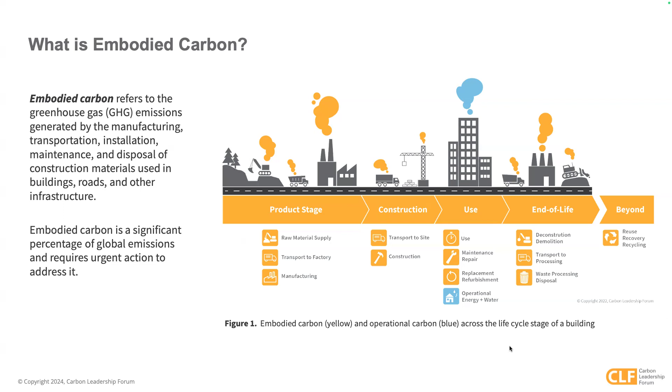It's really critical that we address embodied carbon now, because the emissions released early, the embodied carbon of those materials, are more critical than emissions released later, since we have a limited time remaining before the tipping point of our climate crisis. So it's important that we address embodied carbon now, and policy is a lever for us to be able to scale that impact.

So policies that address embodied carbon are being proposed and adopted at all levels of government, federal, state, and local, at a rapidly accelerating pace.

The Northeast US and Canada case study report was published in March of this year, just last month, and it's a compilation of 9 of these policy case studies, which showcase the range of options available for governments to address embodied carbon. The precursor to this report was the Pacific Coast Collaborative Embodied Carbon Policy Case Studies, which CLF published last year, with a similar collection of policies on the West Coast.

Each of the case studies in the report explores the policy's development process, the stakeholders that were engaged, any challenges faced along the way, and the keys to successful adoption. The case studies were created by interviewing many of the people involved in their successes.

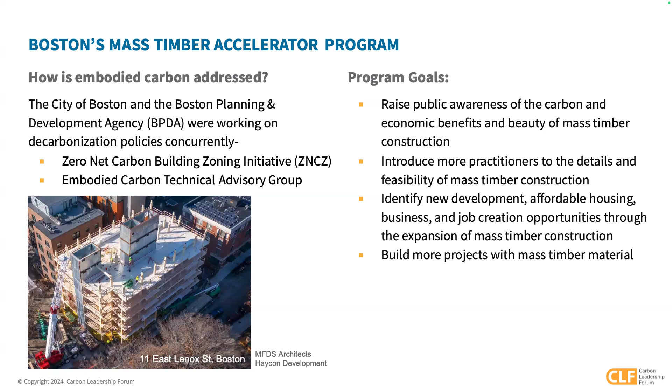The program came together with the offering of $25,000 technical grants, but I think also as important was technical assistance provided through WoodWorks. So we were bringing mass timber building experts into the conversation. We ran two funding rounds and selected a total of 10 teams.

The teams were selected based on projects they had in the permitting process with the city. These were real, live projects, early in their permitting process - sometimes referred to as the land use permits. So buildings hadn't been designed, but we were already asking projects, what are you doing to reduce adverse impacts from building development, and what might you do around embodied carbon? This was a pretty fitting moment to engage project teams. They proposed their particular focuses, their buildings, assessed conditions, investigated design solutions, and did life cycle assessments on the materials.

And then, I think quite importantly, they presented their work to a peer group - the other participants in the program and city folks. We also scheduled education sessions, in particular building code detailed sessions that helped folks really get into the nuts and bolts of putting together a mass timber building.

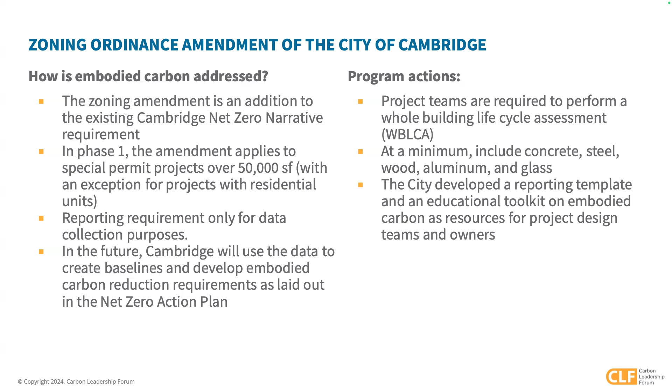Last year we worked with some consultants to help us put together a reporting template and educational toolkit, which Michelle Lambert here was a part of and did a fantastic job with, helping us understand what exactly we should be asking for through doing a whole building lifecycle analysis, and how to communicate these requirements to developers. So we can go to the next slide.

And so while it's great that we have this policy in place, there have been some challenges that we have faced. Partly, it has been really difficult to actually collect this data. Development in Cambridge happens on a boom and bust cycle, and I think we are just in a lower time for new projects.

Our requirements are also quite narrow with the exclusion of residential units, and a lot of new construction happening, a lot of really big new construction, is usually mixed use. So the exclusion of residential really does hinder the projects that will end up reporting on this requirement.

Another challenge we are facing is that Cambridge has adopted a lot of new policies over the past year for new construction - this embodied carbon reporting requirement, but also the Massachusetts specialized opt-in stretch code. Cambridge was also selected as one of 10 communities to do a fossil fuel-free new construction demonstration pilot program. So getting the developer community educated on all of these different requirements now in place is another challenge we are dealing with.

But overall, I think that the development of our embodied carbon policy has been quite successful. While putting together our toolkit and reporting template, we did some stakeholder discussions and industry outreach with architects, sustainability consultants, and engineers to really understand what was already happening in the field around this.

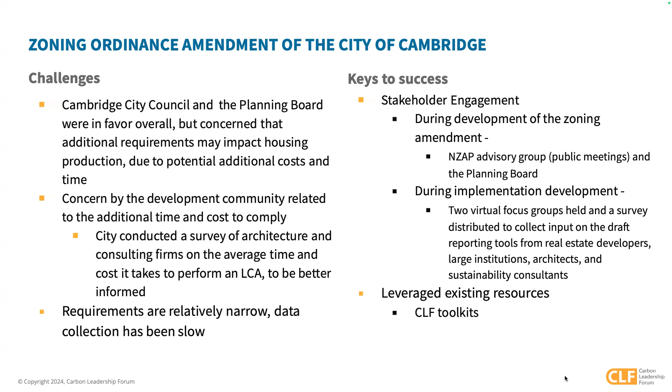And we can go to the next slide. Some of the lessons we learned through doing this work - we had to move quite quickly from the zoning petition that City Council filed to getting our reporting template out there, and that did make the engagement process feel a little bit rushed. So I would definitely encourage people to take as much time as they need, just because this is all really new stuff and it's complicated, but so important.

What really helped make this successful for us was the support of our city council. They really did spur us to do this work, even though we had it in our net zero action plan - it set the fire to get us working on it. So that kind of dedicated leadership does go a long way. I'll leave it at that, but please feel free to put any questions in the chat.

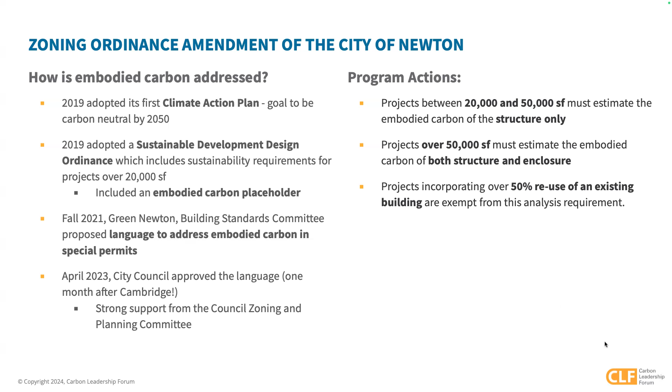Some of the challenges that they faced were that early drafts of these proposed regulations were hoping to address the embodied carbon of concrete specifically, but through some legal review with the city of Newton, they learned that the Massachusetts State Building Code precluded municipalities from specifically regulating building materials. So it couldn't be material specific; it had to be more open-ended in terms of addressing all materials.

One challenge is that just this past December, new by-right zoning options were introduced, which could allow developers to bypass the special permit process. In this case, this ordinance only applied to special permits, so there's a possibility that this may have to find a new iteration in the future if it can be bypassed by a large number of projects.

And then they also noted that small one and two family homes account for most of the new construction actually in the city of Newton, and those are not included in the ordinance. So that is something they would like to address in the future.

Some of the keys to success that were pointed out, again mirroring what others have said, the education of city councilors and others explaining how you measure embodied carbon, what it is, how you address it - really spending the time to do that education. They were fortunate to have some really knowledgeable and engaged volunteers in the city as part of that Green Newton organization, and they were really involved in this process from start to finish. They also noted that one of their successes is really due to a city administration and city council that recognize the dangers of climate change and were willing to take action on this issue.

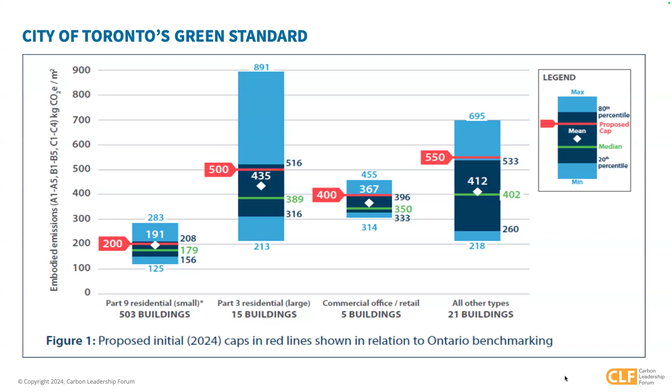So the mandatory and Tier 2 private development caps are 350 kilograms of CO2 per meter squared for residential and commercial, and 400 kilograms of CO2 per meter squared for other building types. The voluntary cap for low-rise residential, so townhouses, is 250 kilograms of CO2 per meter squared, just for life cycle stages A1 to A3. Lastly, the voluntary Tier 3 for private and high-performance city-owned targets are 250 kilograms of CO2 per meter squared for residential and commercial, and 275 kilograms of CO2 per meter squared for other building types.

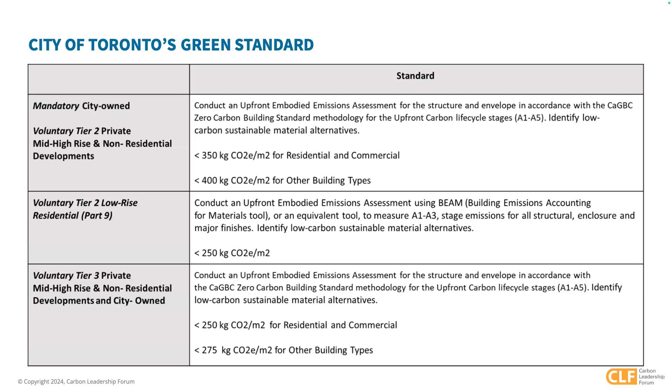So again, we had a couple challenges. We didn't have any data related to the embodied carbon associated with buildings in the area. We had to seek funding from the Atmospheric Fund. We went through a bit of a process, but we ended up carrying out that benchmarking study with those consultants I mentioned before in order to get that data. In consultation with stakeholders, there were concerns about mandatory caps, which is why we stuck to voluntary caps for now, except for when it comes to city-owned buildings.

This is basically a message to the industry saying this is something that we're really considering at the moment. So it's something that may be mandatory as part of future versions of the Toronto Green Standard. We did look at a couple of our city-owned projects that have already been built to see what the embodied carbon was associated with those structures, and we found that they were meeting the caps. So we know that the caps are achievable. We haven't had many projects come in yet that are subject to the caps. We're still waiting on a couple to come through the pipeline, but we're expecting them to meet the caps for sure. And that's about it. Thank you.

Great. Thank you so much, Zach. No problem.

So that wraps up the section on our zoning policies. Again, if you have questions, either specific to a policy or general, please put them in the Q&A box. And we are going to move on now to the government procurement section of policy.

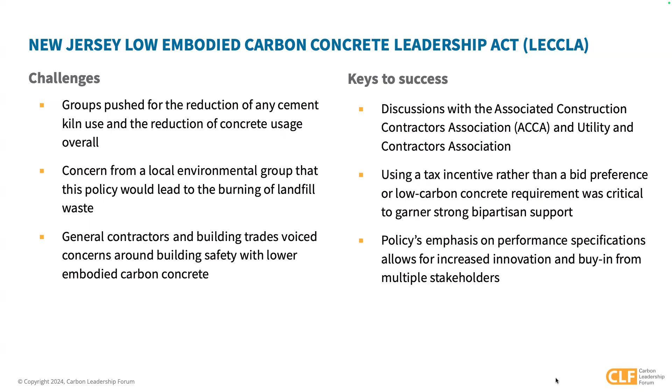And the next category of embodied carbon policy is building codes and bylaws. John Delzell touched a little bit on building codes related to mass timber. And we are now going to hear from Jacob Deva-Rakusin from New Frameworks to talk a little bit about Vermont's Energy Code Amendment.

Hey folks, good to be with you all. I'm Jacob Deva-Rakusin, New Frameworks. I'm the Director of Building Science and Sustainability. I also wear a hat with Builders for Climate Action, so we were involved a bit with the Toronto work on some of the Part 9 embodied carbon stuff. But for this one in Vermont, which is where New Frameworks is located, I was involved as a practitioner. We are a design, build, and fabrication cooperative here in Vermont, and worked with Efficiency Vermont, which is our regional efficiency utility, to help develop some language around inclusion in our state energy code.

So we'll talk about that. There's a funny thing here in Vermont where there is no statewide building code at all. There are some municipal building codes, but for the most part, residential construction flies heavily under the radar, way under the regulatory radar. There's even very lax zoning policy on a statewide basis because we are a super rural state, and in some towns there's literally no zoning or building code whatsoever. So what we do have is a statewide energy code.

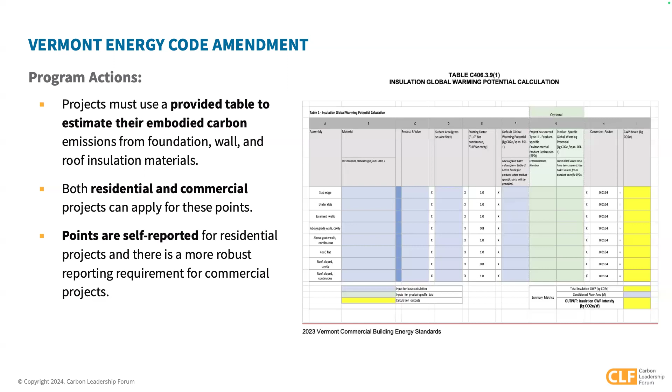So a few pieces around both the challenges and what worked well. Certainly the educational efforts were significant, as you can probably surmise by the fact that we don't even have a regulatory body to enforce the energy code. There's not a tremendous amount of appetite, let alone literacy, around introducing new content areas into the code. So that did take a fair amount of work.

However, there's a really strong cultural appreciation around environmental impact in Vermont. And so there was a lot, even within the practitioners in the room who are usually not enthusiastic about additional regulations, there's a lot of support. It took a lot of work to educate, but the support was there.

And so when we were developing this approach, we recognized that the Vermont statute names part of the goal of having an energy standard is to reduce the state's climate impact. And so because there's an association in following the code that's increasing material consumption that could lead to an increase in carbon emissions, which is partially the intent of the code, that gave the justification that the state accepted for including that. And that was a successful argument for us.

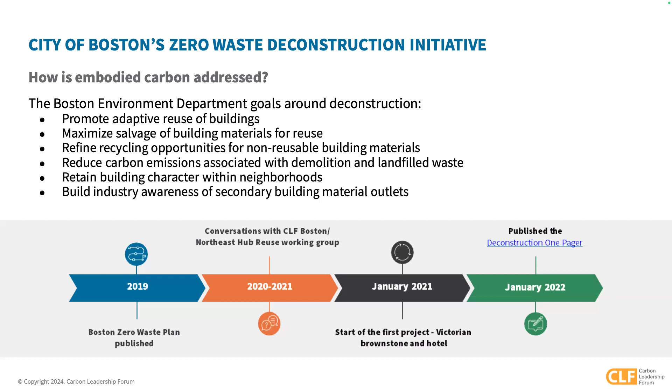The program actions for all pilot projects follow four steps. Starting with fact finding, there was a lot the Environment Department didn't know, so asking what's possible right now, going through industry research and discovery. I was brought in as a technical expert along with Recycling Works Massachusetts, who works through the Mass DEP to provide no-cost technical assistance and connections.

The next action for each pilot was to say what impacts we're looking to track, and how circularity supports zero waste on these projects. There's a lot of data that can be pulled from it, understanding what's being done on these projects to then inform the policy that will go over all commercial projects.

Our next step was course correction through pulling out this data - what exactly needs to change, how can the existing green building laws in the city of Boston be tweaked, amended, or added to, to make sure deconstruction is incentivized and realized as a way to decarbonize and meet carbon or waste goals.

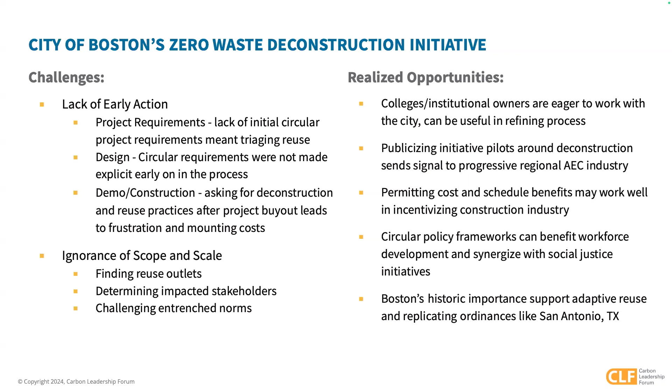So while a lot of this has come from embodied carbon, there are a lot more realized benefits as well.

Looking at keys to success as Boston expands this and brings on more pilots: tying this initiative directly to the Boston Zero Waste Plan, and taking policy and ordinance inspiration from other successful municipalities, whether on the West Coast or San Antonio. We're also framing deconstruction and adaptive reuse as a benefit not only to decarbonization, but also economic and workforce development, affordable housing, and historic preservation, and looking to add onto existing municipal green building requirements rather than reinvent the wheel.

And lastly, really looking to support the local industry and create a policy that is uniquely Boston. A lot of us are proud of working here, and that feel would lead to something we can all be very proud of.

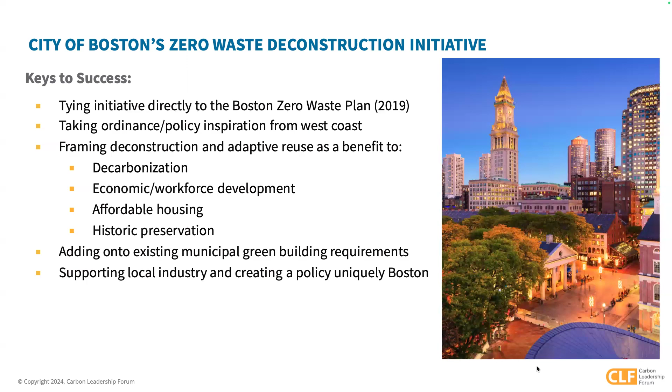I think we're getting a lot of really fantastic information quickly, and it's really exciting to see the breadth of these policies, like I mentioned. Thank you so much. So the last category is planned actions.

We're going to start with the Port Authority of New York and New Jersey's Clean Construction Program. I will give the overview, and we also have Amy Cole with us from the Port Authority of New York and New Jersey to answer questions.

Starting off, the program was launched in 2020, and its first focus was on concrete. The Port Authority evaluated all of their past concrete mixes and the global warming potential of those mixes. In April 2023, they used that research and data to add enforceable concrete GWP limits into their specifications.

From the start, the program had a number of goals: reducing carbon emissions from construction, promoting the reduction and reuse of C&D waste, promoting the circular economy, and reducing air quality impacts of construction activities. Specific program actions include sustainable construction requirements, such as specifications for low carbon concrete mixes, low emission construction vehicles, and targeted construction waste reduction.

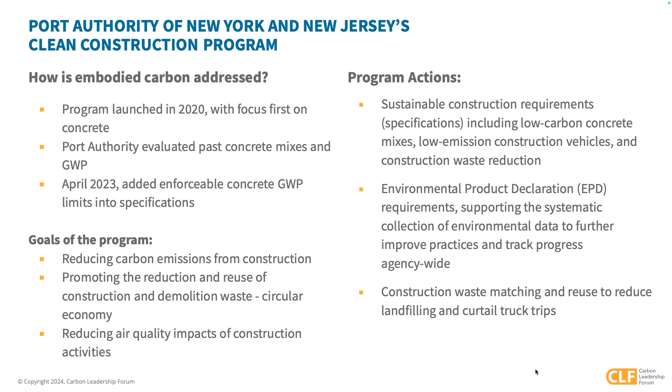Some of the challenges they noted - there are a lot of common themes across different policy types. They specifically reached out to the industry, meeting with ready mix concrete suppliers multiple times, bringing them into the conversation along with industry associations, discussing their concerns and how they could be addressed. They also focused on ensuring smaller ready mix suppliers would not be precluded from doing business with the agency because of these new requirements, making sure to bring those smaller suppliers into the conversations as well.

Some of their keys to success - one of their goals was really to lead by example. A lot of the policies we've heard about are hoping to be first, to lead by example, and then send a signal to the market. They were pushing for change in order to participate in that shift toward lower carbon construction materials, and they successfully engaged their industry and agency partners through this process.

They noted they really benefited from academic assistance from the Center for Advanced Infrastructure and Transportation at Rutgers, who worked closely with the authority to help develop concrete emissions factors, baseline the GWP of all their past concrete mixes, and create and test new lower-carbon concrete mixes. That partnership with the university really benefited this program.

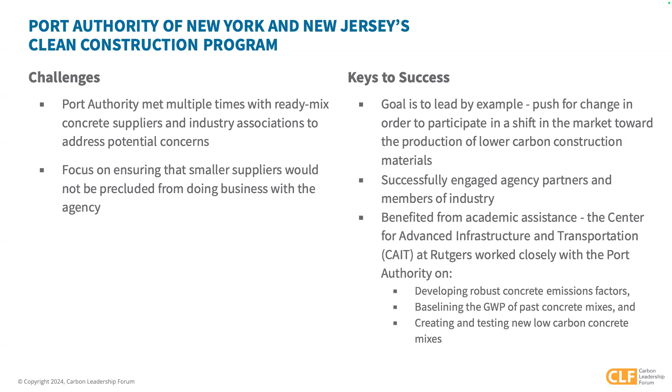Last but certainly not least is New York State's Executive Order 22. We have Marianne Jang with the New York Office of General Services here to talk a bit about that program.

Hi, thanks Michelle. Can you hear me okay? Great, okay, great. Yeah, well, thanks for having me.

I'm here to talk about Executive Order 22, specifically about the embodied carbon guidance as part of that. In the executive order, also called Leading by Example, it's the governor's directive to lead on sustainability operationally throughout the state. There are a number of topics covered, of which embodied carbon is one. The way it was written, new construction and major renovation projects are going to look at reducing embodied carbon through the materials used. The EO was pretty forward-looking, mentioning that at the state level we would be looking at both life cycle assessment for whole projects and also EPDs.

I came on board and started working with the state in September of '21. My first step was to start talking to all the major contracting agencies and authorities across the state, because different agencies and authorities contract for projects in different ways.

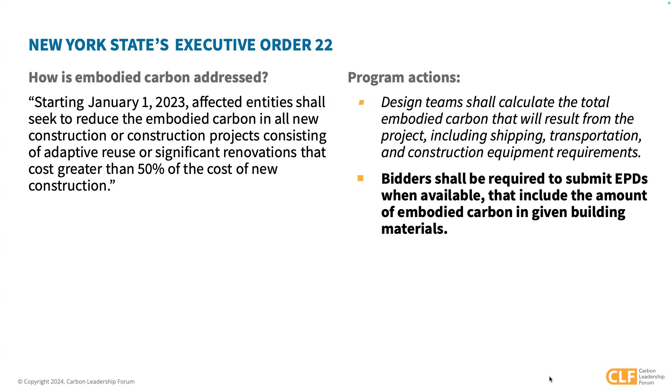In talking through this topic with a range of different actors, we realized there really wasn't a ton of capacity in this area for the state. So our first step was to think about how to create a stepwise approach for reducing embodied carbon in the state.

That led to the embodied carbon guidance issued in June of 2023. It starts with requiring collection of EPDs where they exist. This for us really represented a first step, saying across the state now, for common construction materials: concrete, steel, glass, and asphalt.

For that, we looked across the country at what the GSA was doing. But for these four major construction materials, above a minimum threshold—because we didn't want to impact some of the smaller projects—where your project is over $1 million, we're now asking for EPDs for these materials. We required this to go into contracts starting October of '23, and they have gone in. As of now, we're starting to see some EPDs come in.